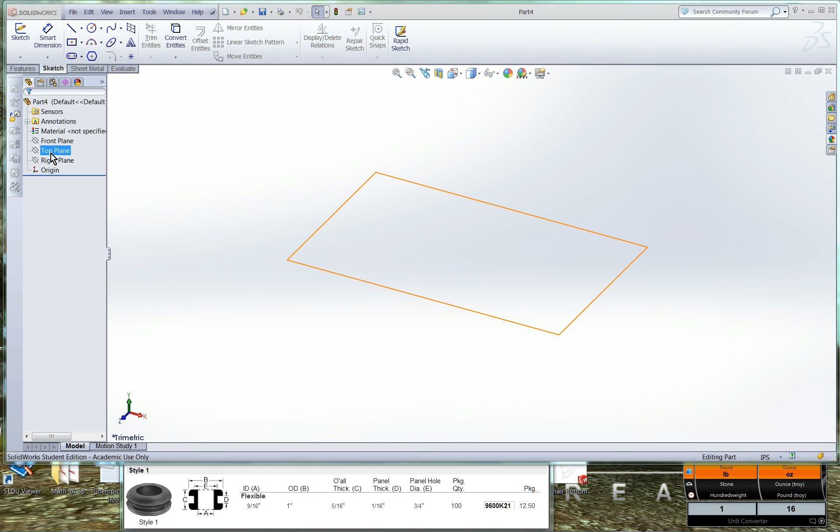The grommets that we're going to be using on our robot are going to be modeled as a revolved feature. So we'll go ahead and begin by opening up a new part file, and we'll start out by sketching on the top plane. So we'll click on our top plane, click on Sketch, and here we go.

The grommets are going to be supplied by McMaster-Carr. Here's the part number down here. You can look it up on the web. McMaster-Carr also supplies all the dimensions and a rough drawing that we're going to use to model our part here in SolidWorks.

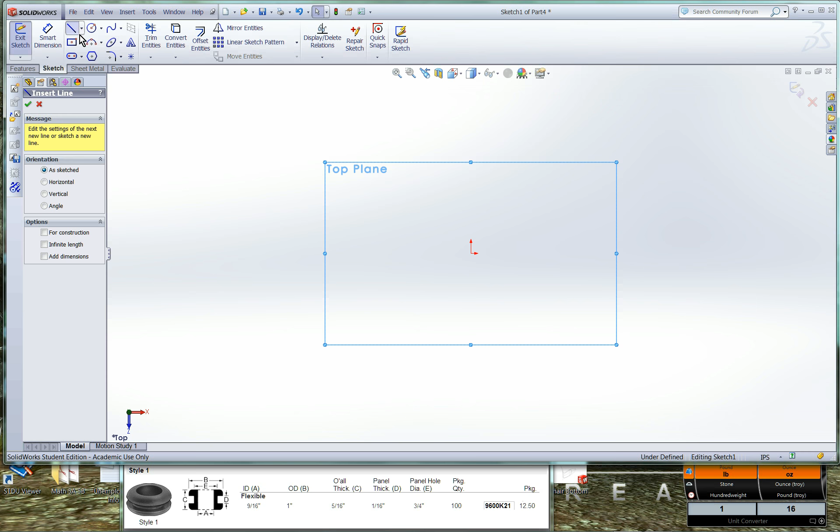Now, the theory behind a revolved part, we're going to take a closed profile like a square or a circle or any closed profile that you can imagine, and we'll revolve that around an axis, which will create the solid. Now, to do that, we're going to only model one half, the right half of this drawing, using these dimensions down here. So we'll begin by creating a rough approximation of the right half, ignoring the roundovers.

So as I'm sketching, do you see the yellow constraints to the right of my cursor? I'm using those to my advantage because they automatically constrain the lines as I'm sketching them on my sketch. And there we go. So now here's a rough approximation of the grommet.

The roundovers are these small radiused edges you can see here on the McMaster-Carr drawing. We're going to add those later on. But right now let's go ahead and constrain our sketch. We're going to begin by drawing a center line. So we'll go ahead and draw a center line from the origin to the center of this first vertical line,

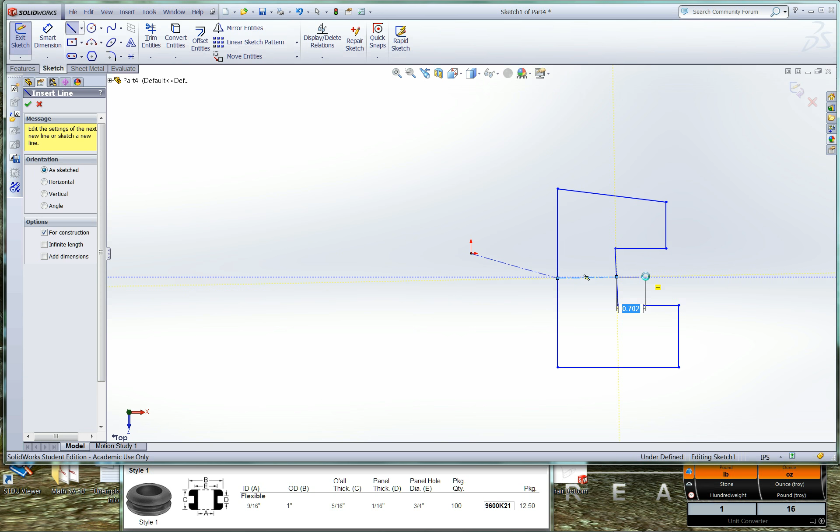and another one from that line to the center of this other vertical line. We'll go ahead and hit escape and exit out of the center line command. Now we can click on these center lines and add a horizontal constraint to each of them. Okay, what other lines are out of alignment? They should all be either vertical or horizontal. So this guy needs a vertical constraint, and this top line needs a horizontal constraint.

Alright, now looking at the McMaster-Carr sketch, the top is symmetrical with the bottom, and we're going to use that to our advantage. Whenever we can use symmetry, let's go ahead and use it. So let's go ahead and select this top line, and we'll hold down Control, which allows us to select any other sketch object. So holding Control, I'm going to left click on this bottom line, and I'll release Control,

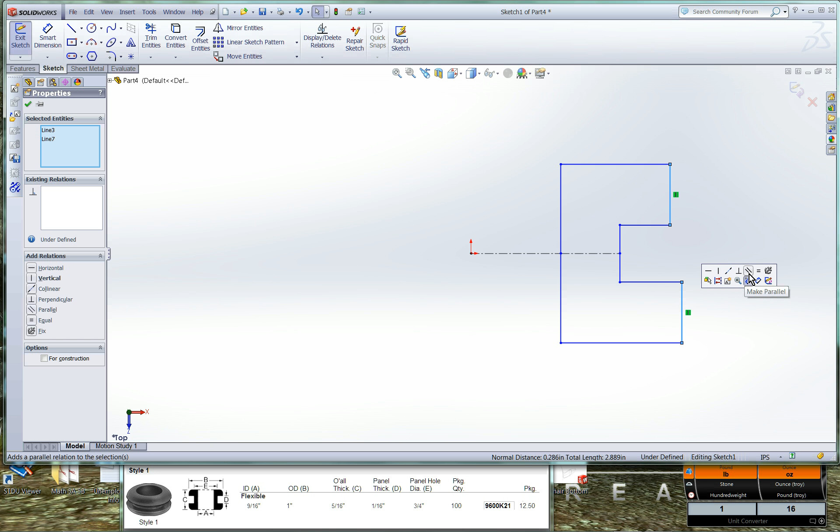and this little menu pops up if I don't move the mouse too fast that has a list of the constraints I can add to these two objects. If you do move the mouse too fast or move away, it's also here on the left side. So we'll go ahead and make these two collinear, which means they're on the same line as each other. And I think that's it with constraints. So we'll now dimension this to size.

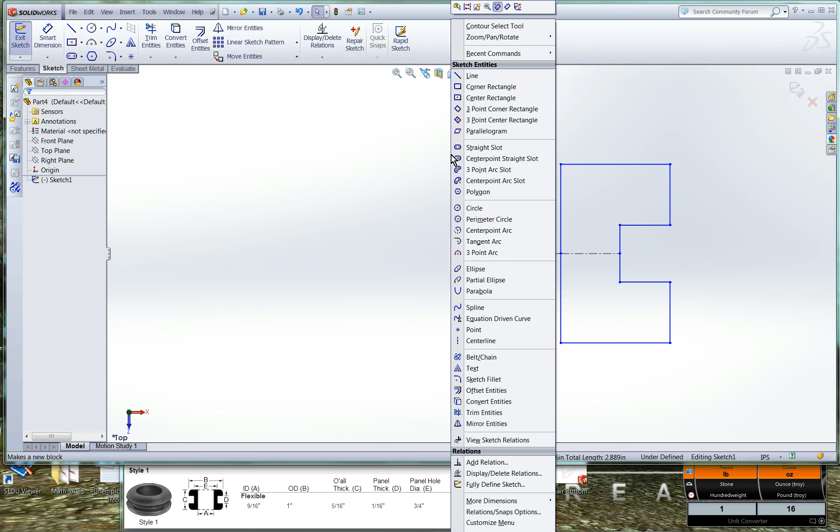In order to dimension the grommet, I like dimensioning my sketches inside out. So we'll start with the smallest inner dimension, which will be A, and then I'll go to E and then B. The reason I don't like going from outside in, if we begin with B, I'll show you right here. If we draw our rough approximation too big, it sometimes has the tendency to provide you with unexpected results. So we'll go ahead and dimension this.

Now, half of B, B is 1 inch, and that's the outside diameter of the grommet, so we can do half of B, which is half an inch, but also our input field here acts as a calculator. So we can actually type in B, which is 1 inch, and divide that by 2, which we all know is half an inch.

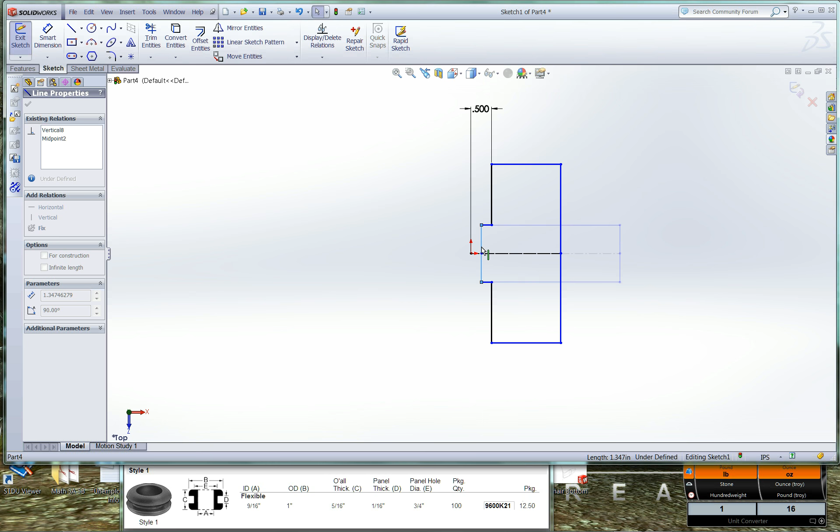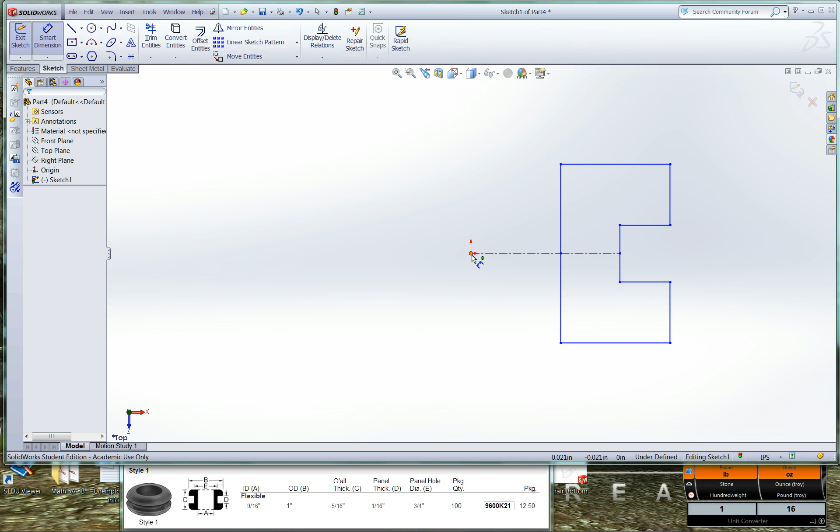So we'll start off with A, which is 9/16 of an inch. So we'll go ahead and right click, Smart Dimension, and we'll dimension from the origin to the first vertical line, the inside diameter. And we'll click out here in space. And we'll set that as 9/16.

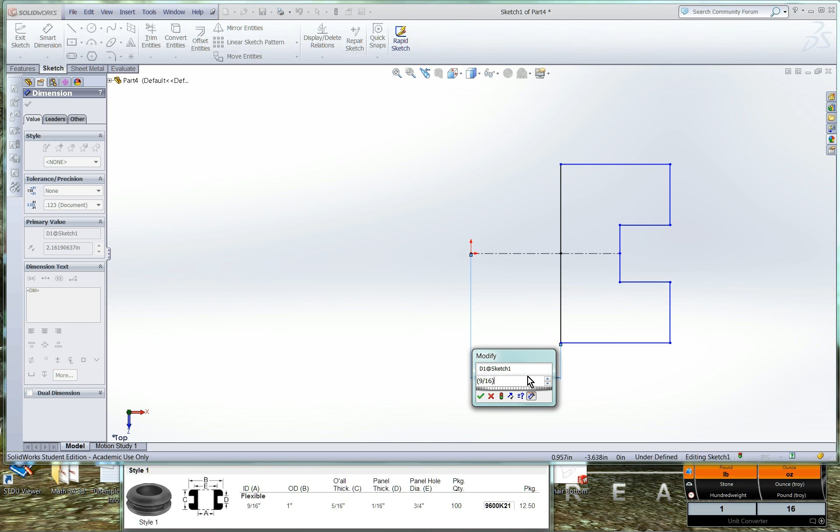So like I said, this field is a calculator, so we can put our 9/16 in parentheses. 9 divided by 16, divided by 2, because we're only doing half of the sketch. And this is what we get, 281 thousandths.

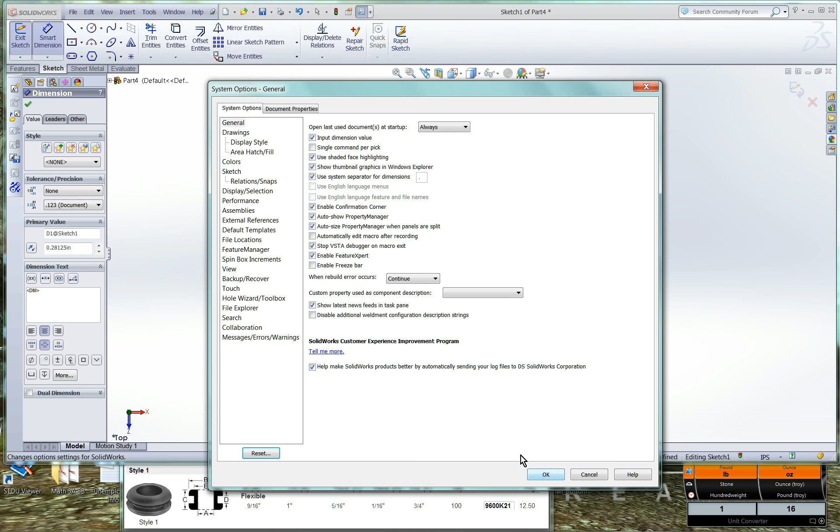Now, since all our dimensions are fractional, let's go ahead and change our dimensions to fractional. We'll change from decimal inch to fractional inch. To do that, we go here to Options, and under Document Properties, you can click on the units, and right now we're using decimals, so for fractions we'll make our smallest fraction a 32nd. So we'll just type in 32 and hit OK.

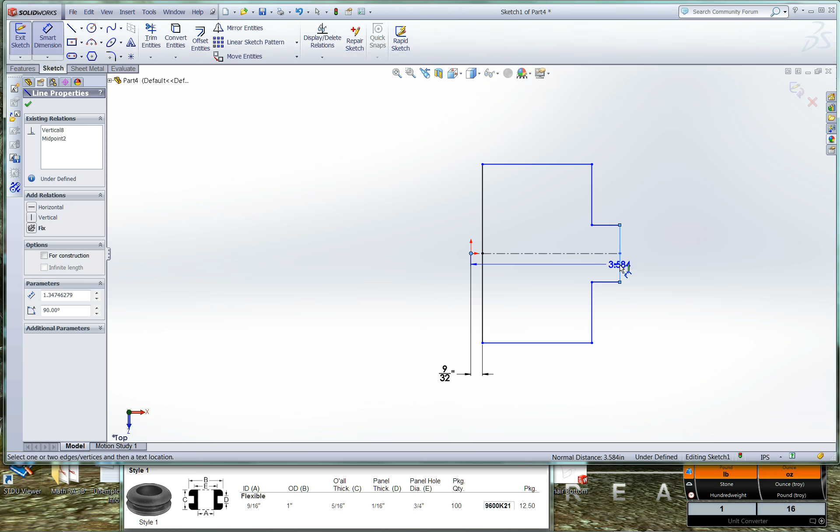And so now our 281 thousandths is now 9/32. We'll go ahead and dimension E, which is the panel hole diameter, which is 3/4 of an inch. So we'll click on the origin and click on the smaller inner vertical line, and we'll click down here, and this is a calculation field, so we can do our parentheses. 3 divided by 4, divided by 2, and that gives us 3/8. We can also just type in 3/8 if we can do the math in our head.

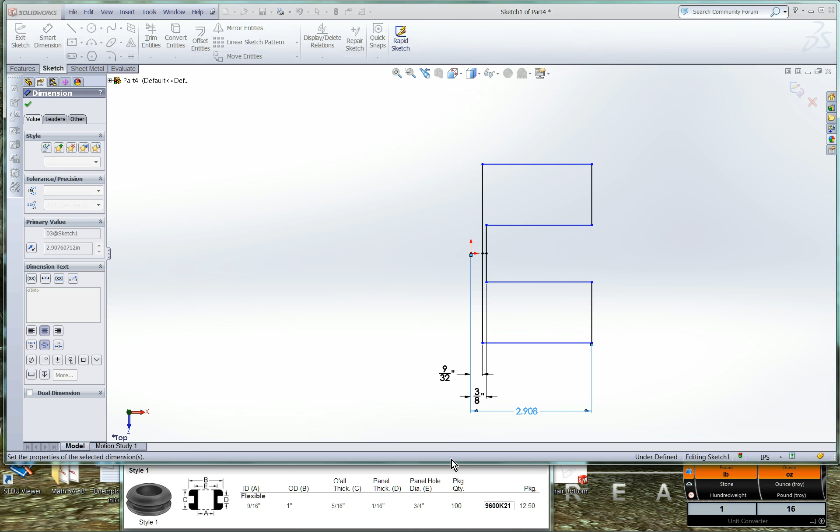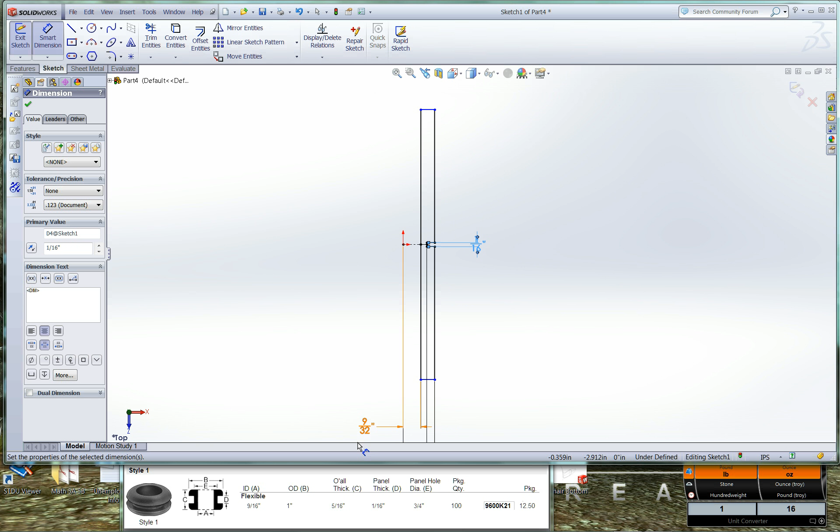And now for this outer dimension B, we can go ahead and click on this line and our origin, and B is 1 inch, so we can just type in half an inch, 0.5, and that's half an inch now. So let's go ahead and dimension the vertical lines here. So we'll begin on the inside here with D, which is the panel thickness. That's 1/16, so 1 divided by 16. And we don't have to divide this by 2 because we're using the full length here. And the overall thickness, so we'll click on the top and the bottom, and that's 5/16.

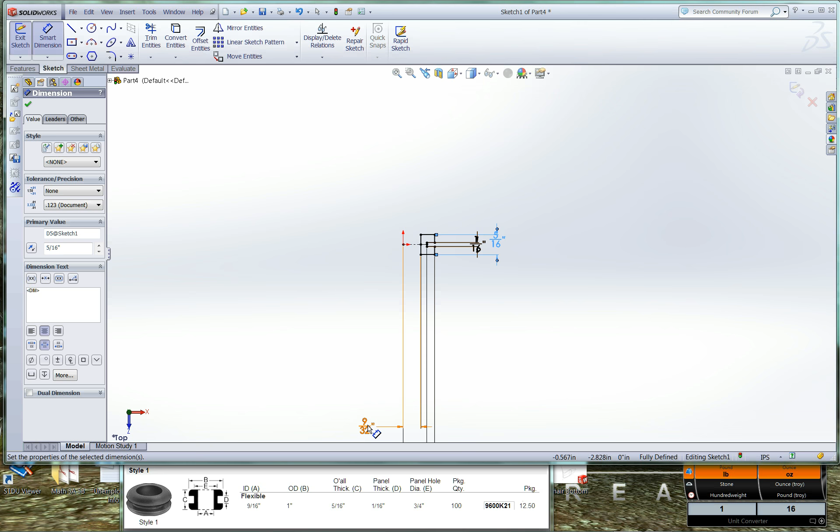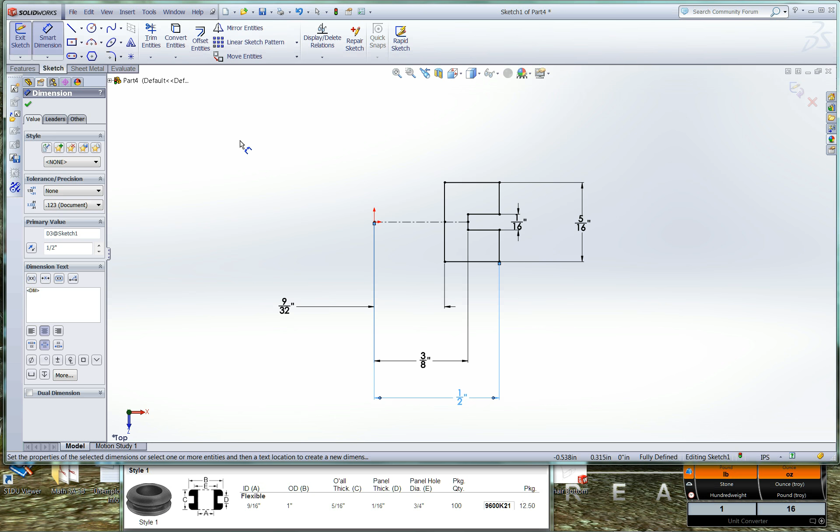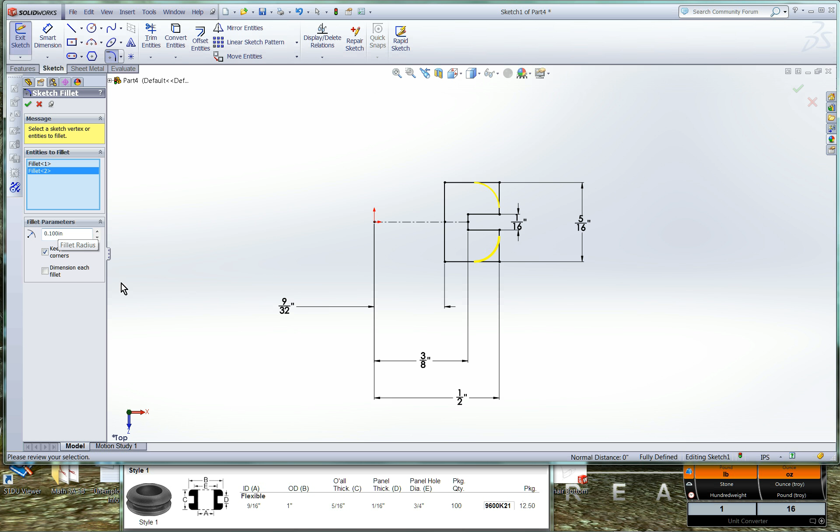Alright, let's go ahead and clean up our dimensions a little bit, and we'll bring them in so we can actually see them as we zoom into the part. Alright, and here we go. Now we have the roundovers. Now they didn't dimension the roundovers because they're not a real critical feature. So we're going to use the sketch fillet feature, and it's going to ask for entities to fillet. So we can click on 2 lines that we want to fillet, or we can just simply click on the corner that we want to fillet. And we'll leave it at the default 100 thousandths of an inch since it's not a critical dimension. And we'll go ahead and green check mark. And now we have our roundovers and our profile fully dimensioned. So we'll go ahead and green check mark.

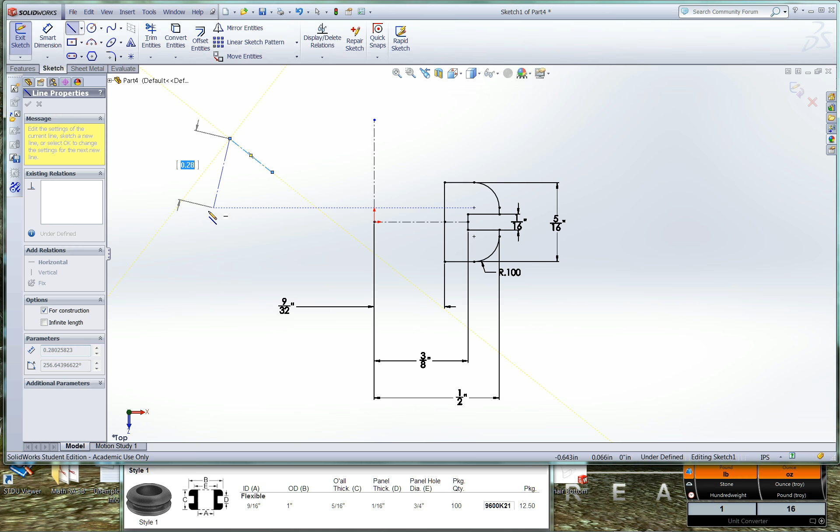And now we need to add our axis of rotation. So we'll create another vertical center line. We can just click out in space. It doesn't really matter where we click. Also, if you want to end a line, you can just double click and that ends the current line command. So if you're drawing a series of lines and you want to stop here, you can just double click and that stops the line command. And we'll just delete those.

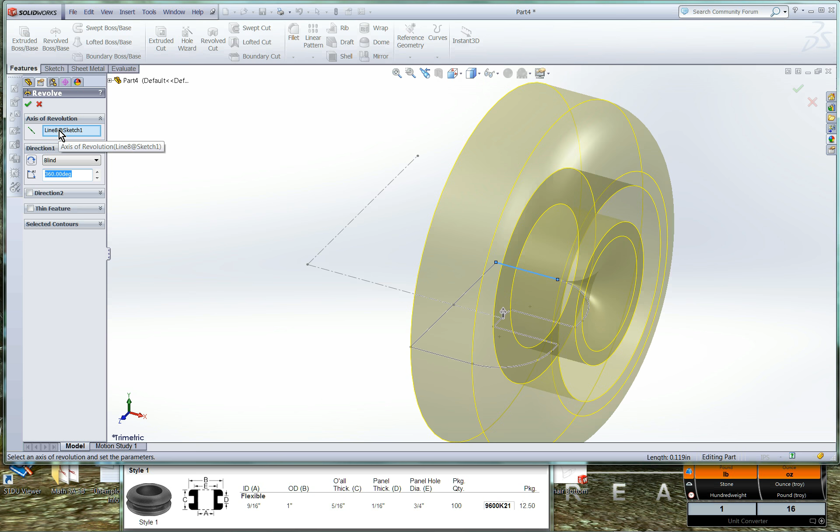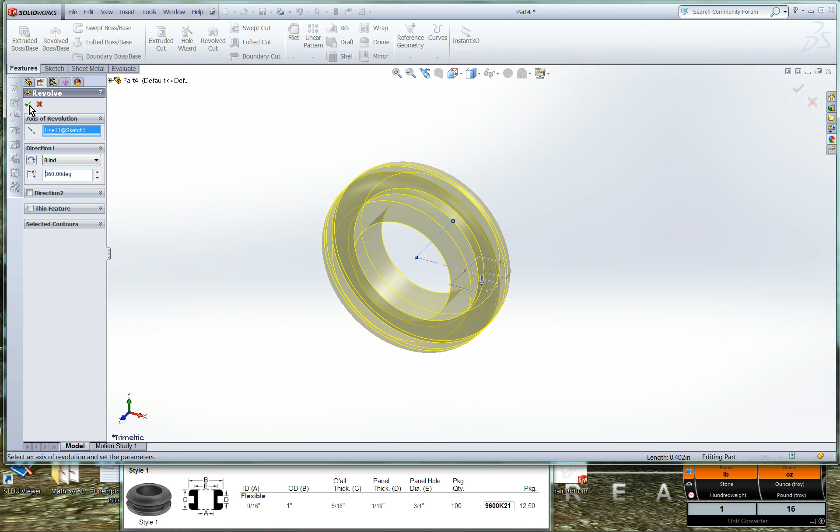So we can go ahead and exit our sketch now, and in our Features tab we'll go to the revolved base, and it's going to ask what sketch do we want to revolve. So we can just click on the sketch we just had, and it just chose for us some arbitrary axis of revolution. So we can go ahead and delete that, and we'll click on our vertical line that we created, and here is our grommet. Now with the revolve feature, we can choose how many degrees we want to actually revolve the part. And just like the extruded base, there's the select contours, thin feature, and other directions that we can use, but we want a full rotation, so we'll do 360 degrees and green check mark. So here is our grommet.

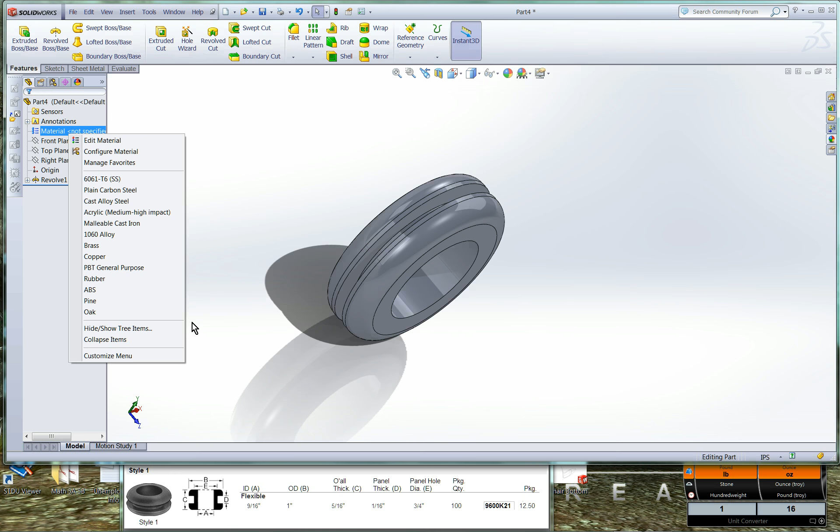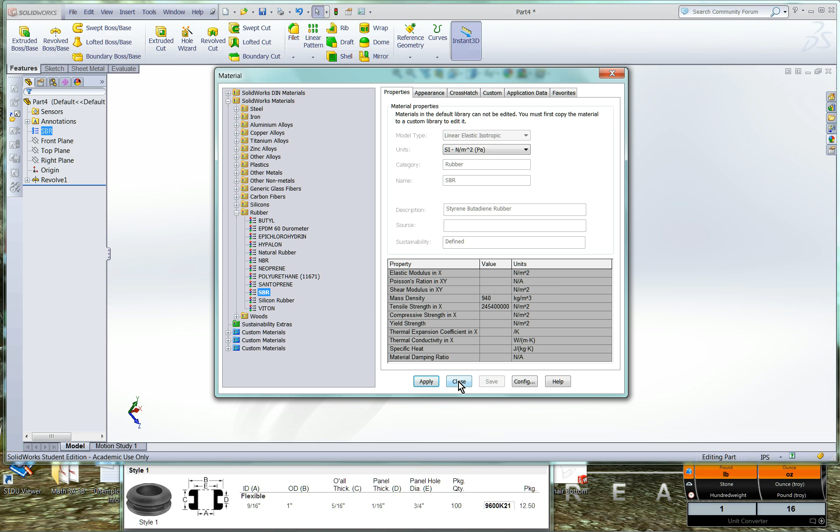Now let's go ahead and change it from this ugly gray to the actual color it's going to be, and to the actual material it is. So we can right click on material, and our rubber on the McMaster-Carr website, it says it's styrene butadiene rubber. We can go to edit material and look under the rubbers. So styrene butadiene rubber, SBR. So we'll go ahead and select that. It has our density and tensile strength in here. We can apply that and close this, and it's now a white color.

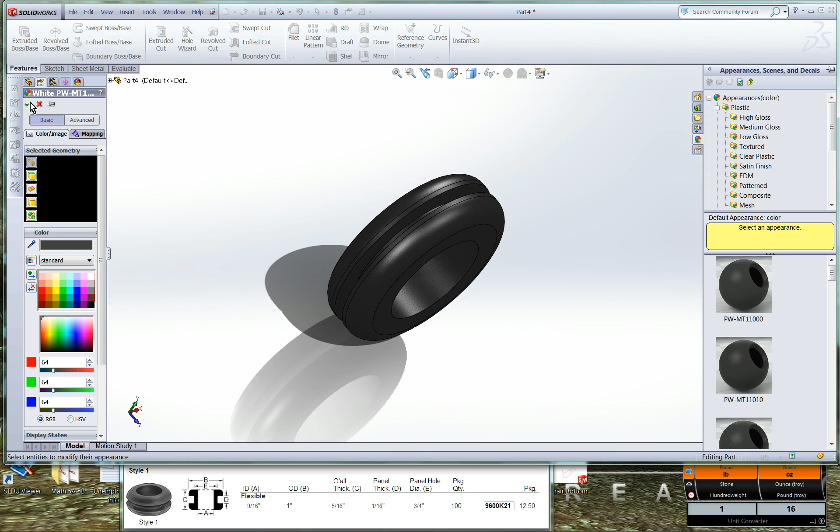And in order to change the colors, you can right click on the part, click on the colorful ball, and click on the part. And now we'll change it from a white to a charcoal gray, which is a more accurate representation of our grommets. So here is our grommet.

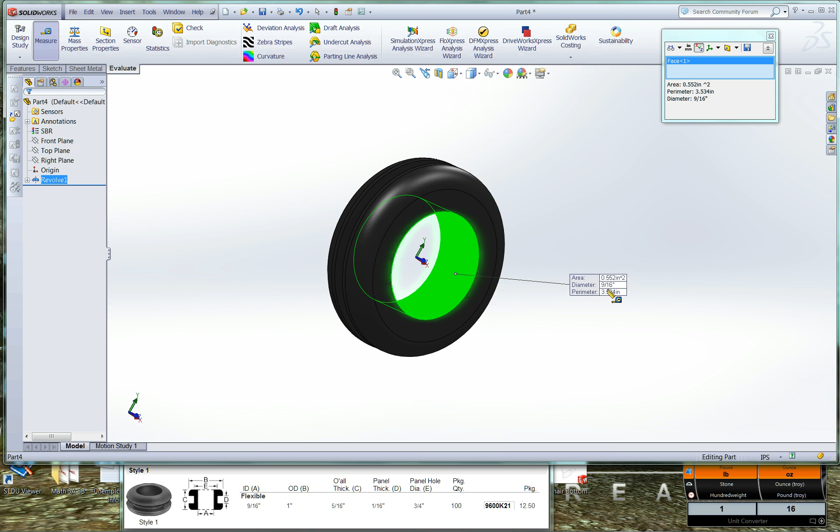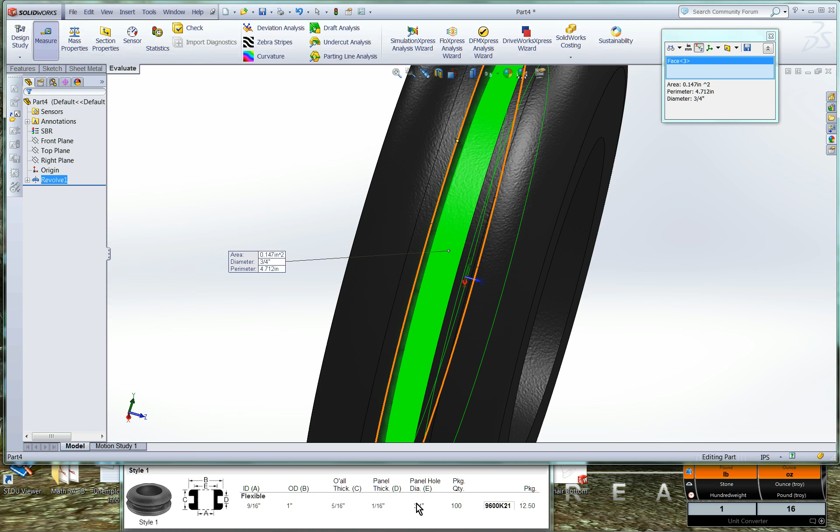Now to double check that we did our sketch right, we can go to the Evaluate tab and we can measure. So if we click on a round surface here, it'll give us the area, the diameter, which is 9/16, which we have here as A. We can click out here on the white space. We can click on a little flat section here, which has a diameter of 1 inch, which is our B dimension. And if we click on the inside, we have a diameter of 3/4 of an inch, which is our panel hole diameter here. So we did everything right. So here is our grommet.